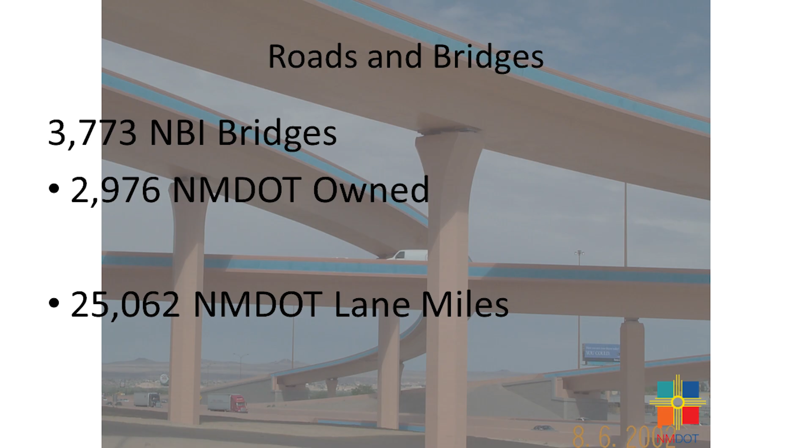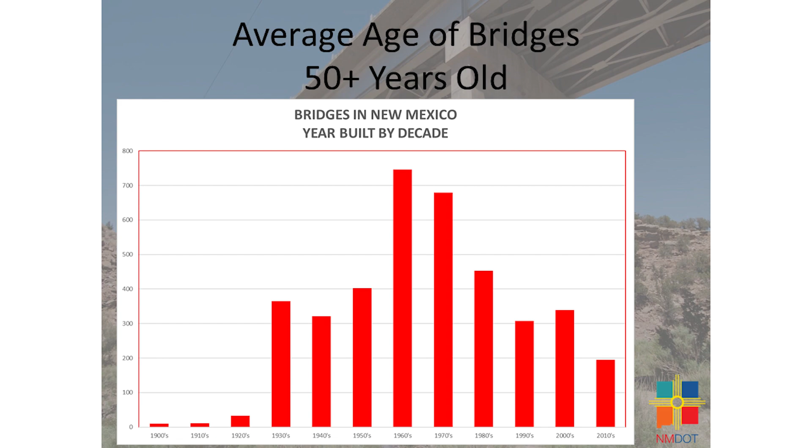So now that graphic, I brought it back up. I gave the history of what kind of went into this, and when you saw those, the main bridge construction being done in our state, now you can see that most of the stuff we're trying to preserve was in that 50s, 60s, and 70s time frame. And like most Western states, we're limited with our funding, and in the last few years with increased costs, it's getting even tougher and more of a challenge to preserve and replace these bridges.

So even with bridge formula funds, which has helped, it doesn't really increase how many bridges we can address, just because New Mexico has seen a 50% per year increase in bridge costs, and last year was over 100% increase in costs. That's due to material shortages, labor shortages, and a lot of challenges.

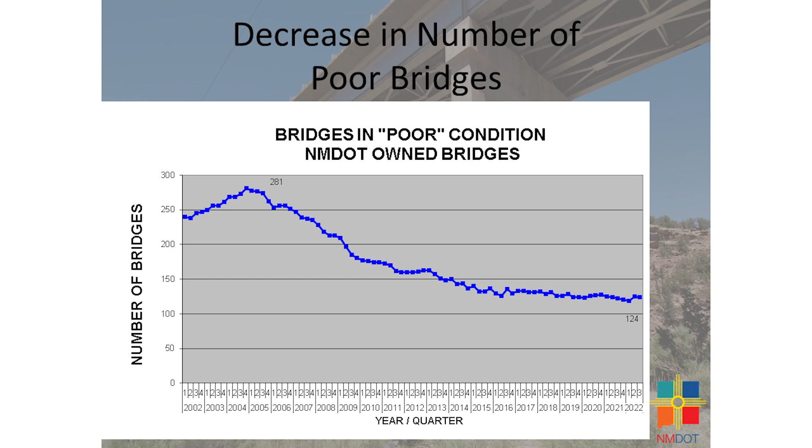So this graphic is of our poor bridge inventory, and it goes back to 2002. In 2002, we had about 300 bridges that were in poor condition. New Mexico has tried to address poor bridges through preventive maintenance and preservation to try and stretch those funds we have. So we established a program which I think was unique at the time to focus on bridge preservation, but a lot of other states have started doing similar. You can see now we're down to 124 poor bridges that we own.

Our preventive maintenance program, like I said, in the early 2000s, there was starting to be a focus on bridge preservation just because the cost to replace bridges means you can't do too many replacements. So to stretch those funds and keep our bridges in place and servicing the public, we focused on preventive maintenance.

Up until about 2015, we were using federal funds to do price agreement work and preventive maintenance work, but that changed, and it shifted to being more done with state funds. In 2013, the DOT established a program where they took $14 million off the top of the state budget to set aside just for bridge preservation and maintenance.

It was put to the Bridge Bureau and the state bridge engineer to use the condition ratings and the condition data from inspection to determine priorities for what bridges should be focused on that year. And then we're looking at it in 4-year intervals to do bridge priorities.

But again, we didn't have a lot of state funds at the time, so the breakdown was $12 million federal funds, which focused on the NHS bridges, and about $2 million of state funds was used for the non-NHS bridge structures. So in that time frame, we've done a good job of decreasing the amount of NHS bridges in poor condition, but not a lot of focus on non-NHS.

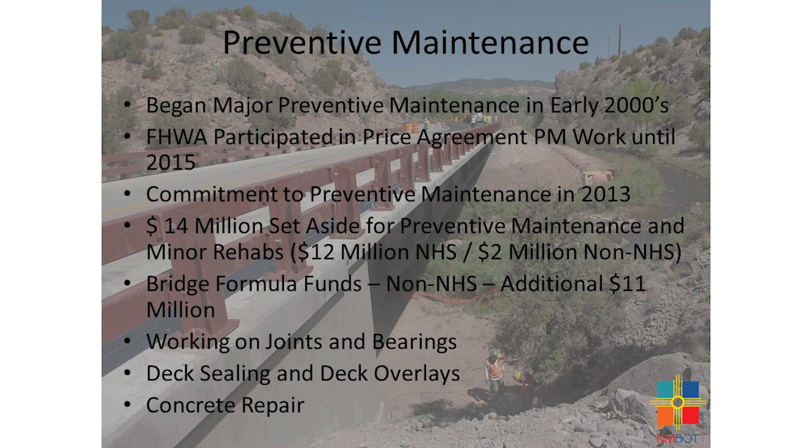One of the things we've run into with our priorities as far as preservation, and that have turned into emergency repairs, is bad joints and bad bearings. The other things we focus on a lot with this money are deck sealing and deck overlays, and just concrete repair.

So two of our methods of doing preventive maintenance: we do state funding price agreement work. The advantage of this procurement is that we can get 3 bids from contractors pretty quick. They come to an agreement on materials with the districts and quantities, and then we can issue a work order right away. So if there's an emergency situation where we need work done quickly, this is the best method to procure that, but it does come at a higher cost.

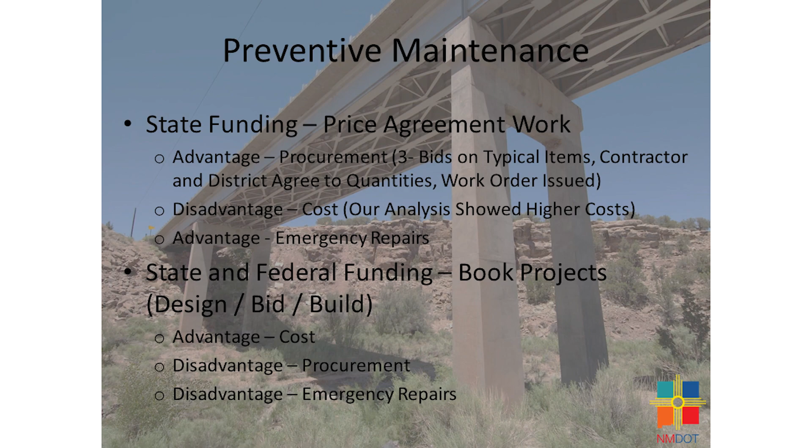The other method we use is just doing typical book projects using state and federal funds. The advantage of these projects is we typically get them designed and built for a lower cost, but the disadvantage is the length of procurement, and it doesn't help out when you have an emergency repair where a bridge is impacted and needs to be opened up quick.

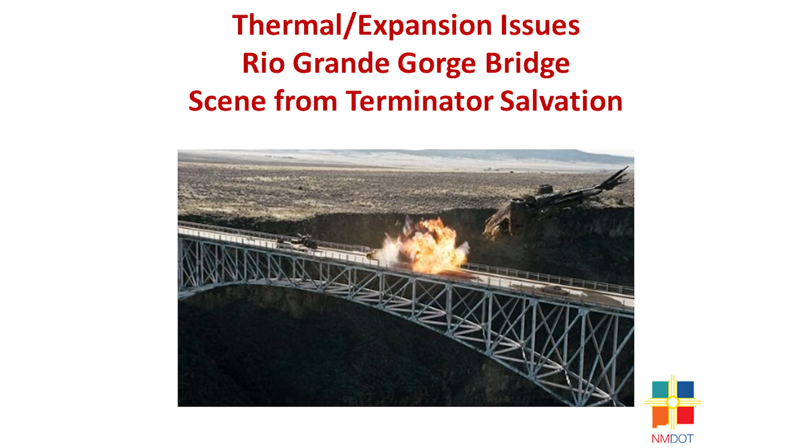I don't know how many of you have seen the Terminator Salvation movie. Like I said, the movie industry is big in New Mexico. This was one of the first big blockbusters filmed in New Mexico, and through CGI they were able to blow a car up on the bridge. So don't worry, the bridge is safe. But if you haven't seen the movie and now might be interested, you can see the Taos Gorge Bridge with its explosion on it.

I'm sure a lot of western states have the same issue we have. We see a lot of thermal cycles daily, with a temperature delta from 40 to 50 degrees, so our bridges move daily. When things don't move, problems start to occur. Due to lack of funds and manpower, our steel bearings have become problematic.

Within the last 5 years, we've had several significant bridge bearing failures that required emergency repairs, and we even had to shut the roadway down. We almost lost a couple of spans, and Rio Bravo over the Rio Grande River, just south of here, was one of the first ones. It happened the day before Christmas.

I was out there and had to shut the bridge down, and the local traveling public was not too happy about it. They moved the barriers and tried to cross the bridge anyway, and I had to stop traffic. They yelled some four-letter words at me and some of the other DOT staff, so that's how I spent one of my Saturdays. But after that, we've seen more of these failures.

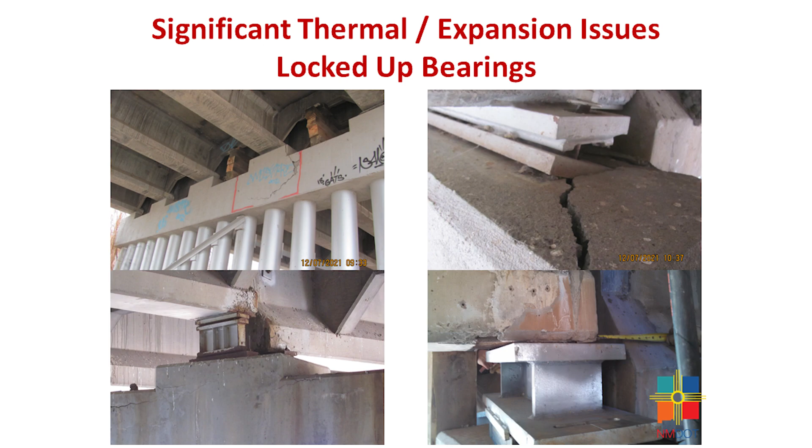As you can see in that upper right photo, this is the concept of thermal arching. When our deck heats up, it's a big element that absorbs a lot of heat, and it arches. If you have pre-stressed girder ends that are restrained, you get tension and compression, or axial forces, in those beams, creating a beam-column effect. Those forces go into the cap, causing bearing problems, cap failures, cracks, and broken or bent anchor bolts, like what you see in those photos.

Here's a photo of I-25 over Gibson, just south of here. This is one of the first ones I got brought into. I was still consulting at the time, but through the on-call, they brought me in to come up with a repair. As you can see, there's a pretty large crack at the end of this cap, caused by that splitting force, and it was exacerbated by the original design. The designer didn't put steel stirrups at the end of the cap; the first one was 14 inches in from the end, so there was nothing there to resist cracking, which is why that crack opened up.

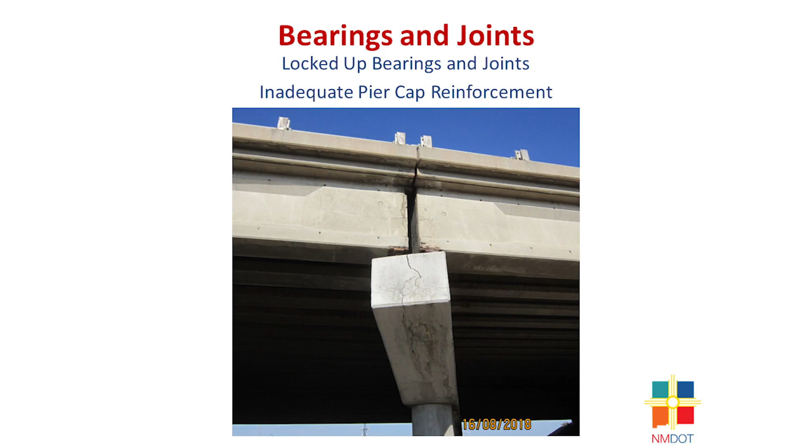It did get the attention of the news. Everyone local knows Larry Barker is the investigative reporter, and he had it on a story, so they got me out there to look at it. I took a three-step approach to repairing it.

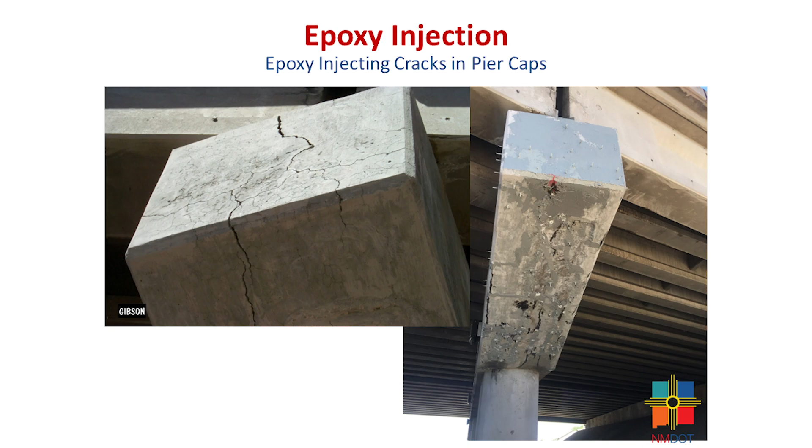The deck joints needed replacing, but because it was so locked up, I wanted to stabilize the substructure first. So we did epoxy injection in the cap, which you can see in that right photo. After that was in place, we took it a step further and fiber wrapped it to encase and confine it. Then, due to not having shear stirrups at the end, we took it even further and put steel plates on each side with all-thread rods above and below the cap to tie those plates in.

On the right side is a photo from District 2. Jonathan Boyle, who's here today, his crew did this repair for a similar type of problem they had, using their local forces. So this has kind of become one of our standard go-to details for repairing these issues.

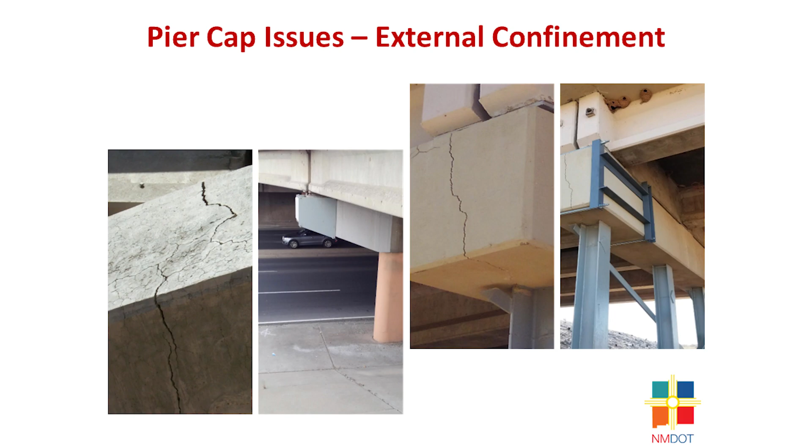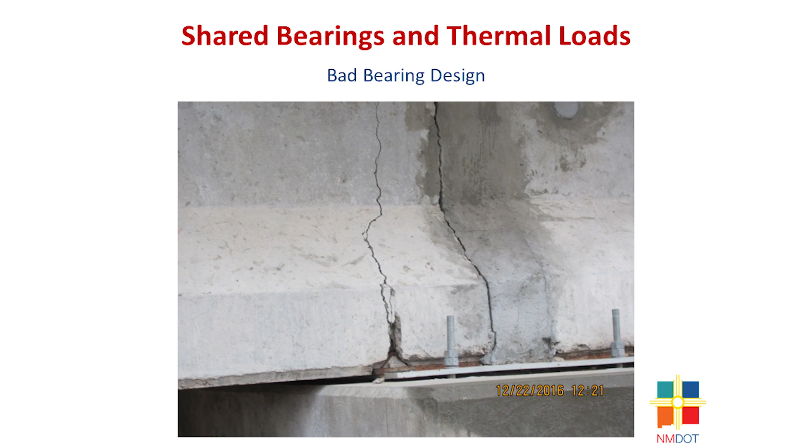Again, with thermal restraint, we had some bad details. Earl has some of these bridges in his inventory, and we've worked on some of them. This one's a local county or government bridge with a shared sole plate. They were trying to do a steel continuous type detail when they designed it, but the girder wants to rotate with that arching, and it splits the girders. So we have a lot of girders split on the ends with this shared sole plate, and there's not really any bearing there. The designer used a quarter-inch or half-inch thick unreinforced elastomeric pad, and these are type 63 girders, so it's a big bridge with a big span, meaning a lot of force is generated, causing problems.

Other preservation activities we do include a lot of deck sealing and deck overlays. This is probably familiar to a lot of you: flooding the deck, putting down the epoxy, and then the broadcast aggregate, which you can see in the finished product in that upper right photo.

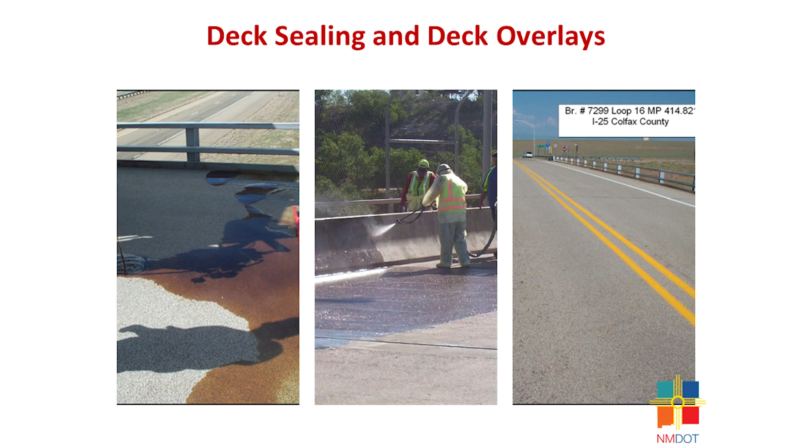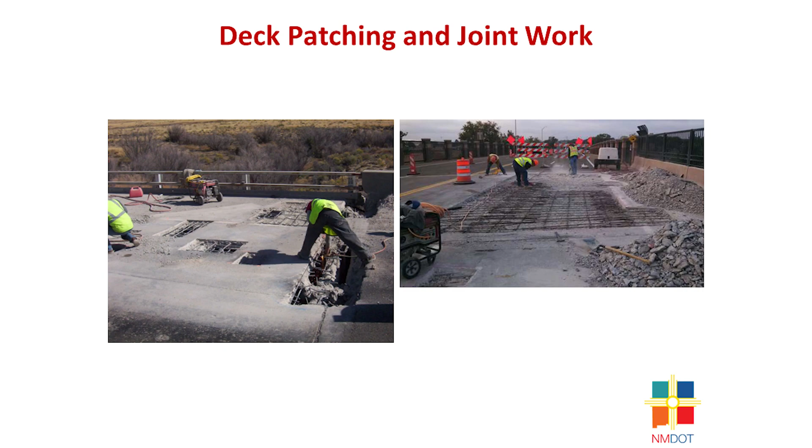Jeff Vigil, my bridge management engineer, wanted me to discuss these photos and highlight them. He and Earl have gone to different preservation and bridge management meetings, and some states have a limit on how much bridge deck they'll repair or patch. In New Mexico, we'll take it to about 90% before we replace the deck, which you can see in this photo, so we take it as far as we can before replacing it.

Again, some more concrete repair. Older bridges built during the interstate building era had widely spaced stirrups in the pier caps, so we get a lot of concrete spalling and delamination. There were attempts to repair it, and it just did the same thing again. So we go in and add additional reinforcement, shown in the left photo, to give that concrete something to bond to, and that's worked out successfully for us. The upper photo shows the amount of deck patching we will do and have had to do on the interstate.

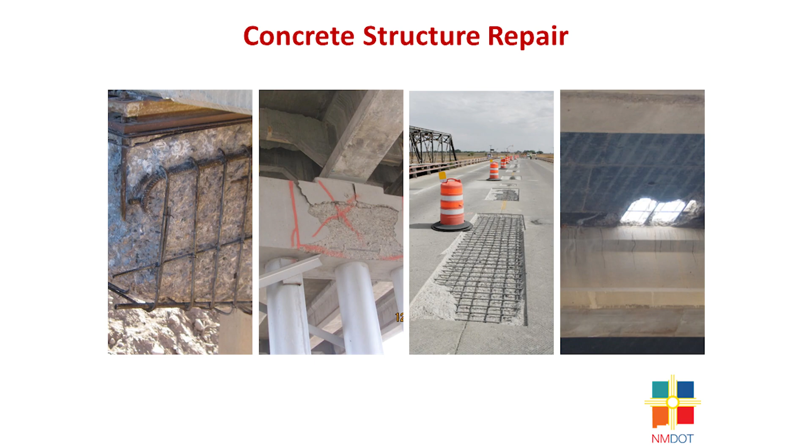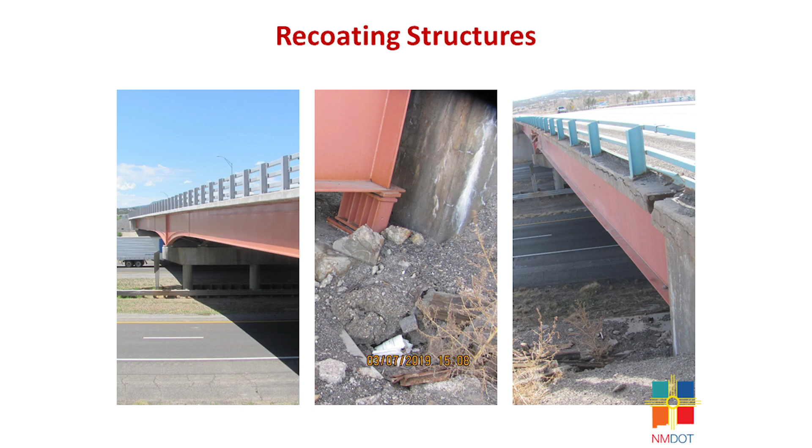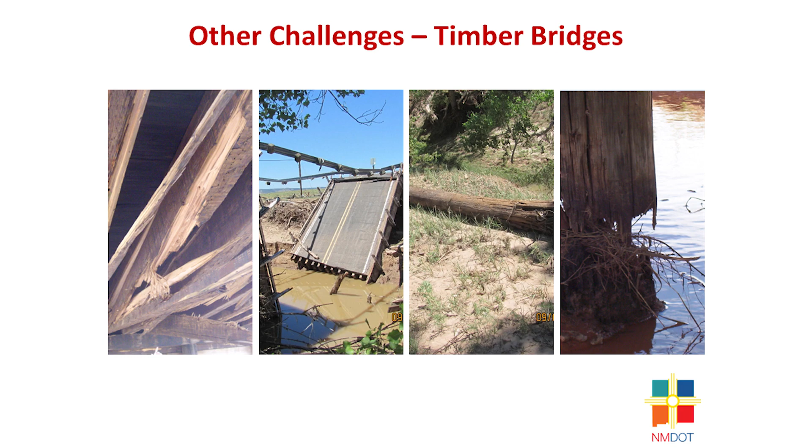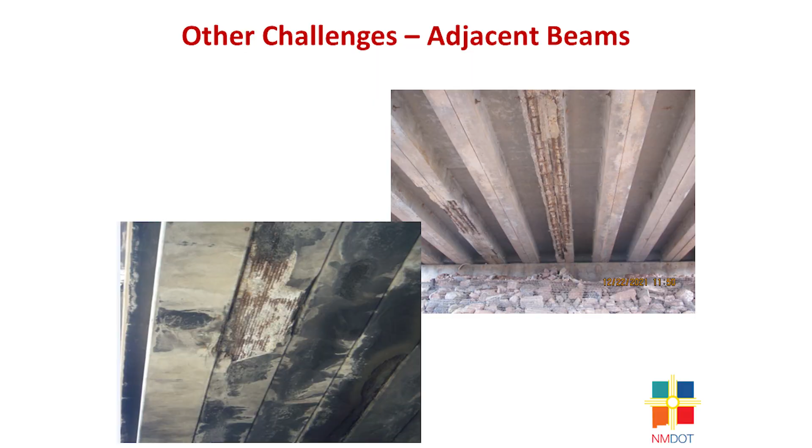Another one of our standard designs built with those bridge standards developed early on are adjacent reinforced concrete structures and box bridges. The joints leaked, and that's one of the biggest issues we get - leaking joints. As you can see, the bottom flange of these channel girders has delaminated and fallen off, and then you get a lot of corrosion on that reinforcement. So we're focusing on trying to replace these bridges because preservation really doesn't work well for them now.

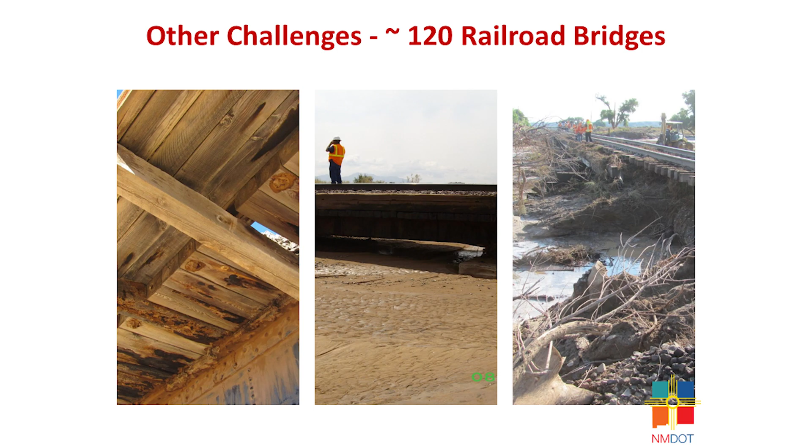Another unique thing for New Mexico DOT is we also own railroad bridges - we have 120 in our inventory. Most are timber structures with the same issues: the ballast holds and collects water, starting to rot the timber deck. Then we get high flow events, shown in the right photo, with debris buildup and silting. We've had to shut down the rail line for 24 hours to get it cleared out, but the railroad doesn't like that - it services several Amtrak trains a day, so they get on us to keep it open.

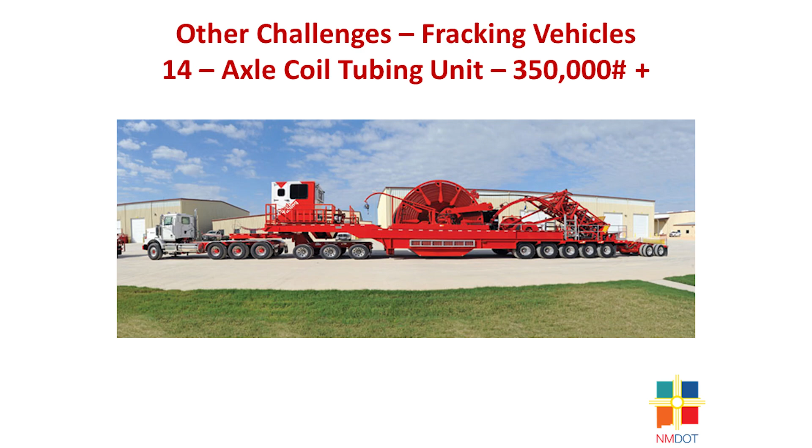Finally, some issues we have with our oil and gas industry - we have a lot of fracking. I'm not sure if you've all seen this, but here's one of our 14-axle coil tubing units that cross through our state. This one weighs about 350,000 pounds, so you can imagine the stress this type of load puts on our bridges, and this isn't an infrequent load - it's routine, daily, weekly, primarily in the southeast portion of the state. Luckily we don't have as many span bridges there, mostly culverts, but we have had some bridges become headaches that we've had to replace just to carry these loads.

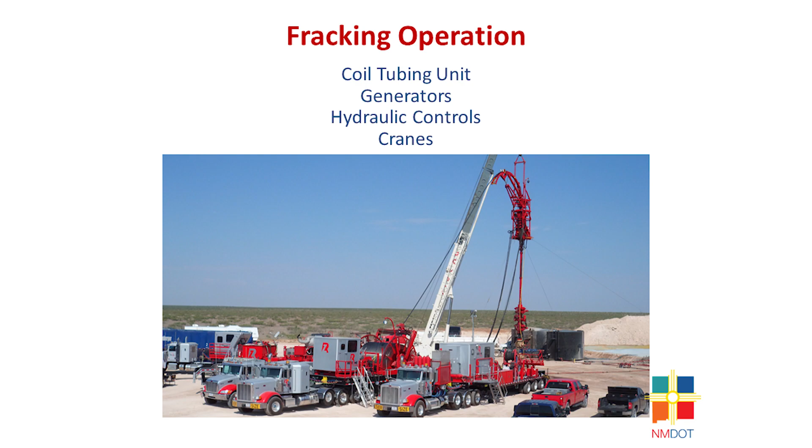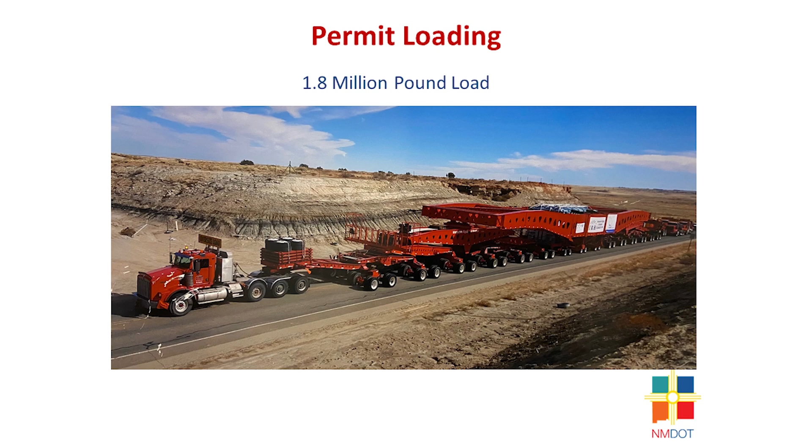This is what you typically see at a fracking site - coil tubing units, generators, hydraulic controls, and cranes, and all of these loads are heavy permit loads. I thought I'd throw this one in too - we do get this once in a while. This is a 1.8 million pound load that went through the state several years ago, and again you can imagine the amount of stress this produces.

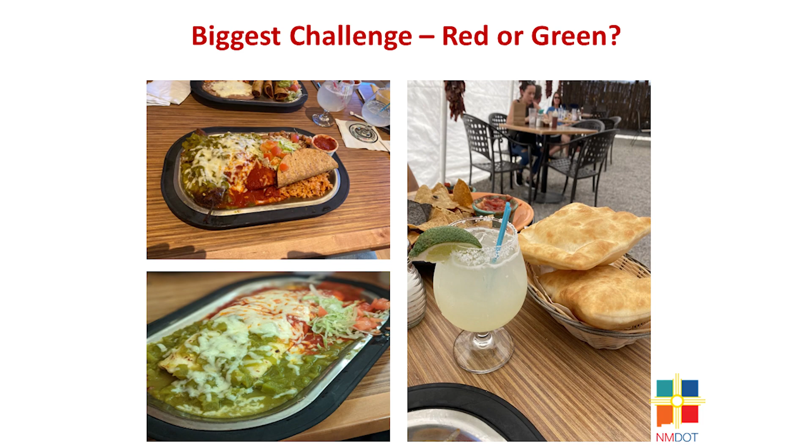I'm a little over on time, but we're pretty close to the end. Jeff Veal wanted me to throw this out there - the biggest challenge for us is, do you pick red or green? Or if you're like me and can't decide, you go Christmas. So hopefully tonight you can enjoy some good local cuisine, a margarita, and some sopapillas. Again, welcome to New Mexico. Thank you all for getting through this with me. If you have any questions, let me know, and have a good one and enjoy your time. Thank you.